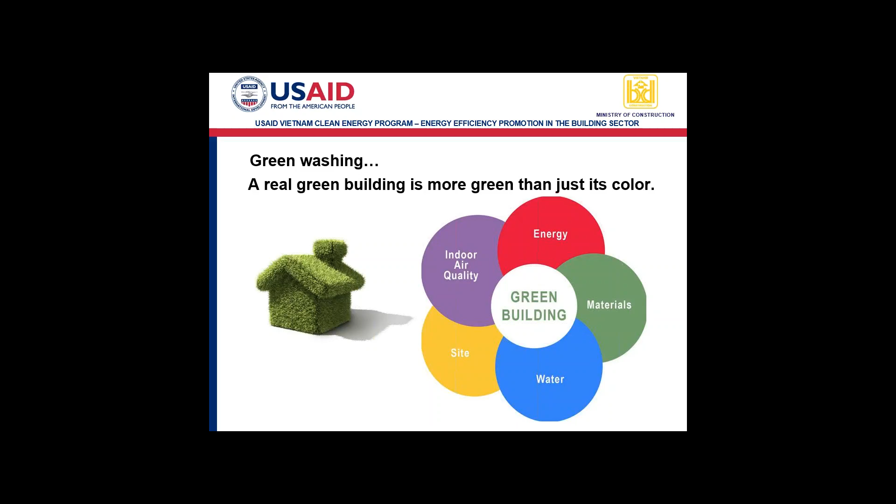Thế thì chúng ta lưu ý ở đây xây dựng công trình xanh không chỉ là xanh hình thức, mà nó phải đáp ứng được tất cả các yêu cầu ở các khía cạnh khác nhau của công trình. Many building owners want to market their building as being green, but they don't want to spend the money to do it. Nhiều chủ công trình mong muốn có được cái nhãn là công trình xanh để phục vụ cho việc marketing, nhưng trên thực tế thì họ lại không muốn đầu tư nhiều cho công trình của mình.

So what do green buildings do? They assure improved building quality. They assure social and environmental responsibility. They affirm higher quality of life for the building occupants and lower building operating costs. These are all things that green buildings do.

Và một công trình xanh cần phải đáp ứng được các yêu cầu về mặt chất lượng công trình, cũng như là có chi phí vận hành thấp hơn so với các công trình thông thường, cũng như là nâng cao chất lượng cuộc sống của người sống và làm việc ở trong công trình đó.

We're talking about possible incentives, tax incentives, cost incentives, refund part of the VAT tax, and electric tariff reduction. All of these are possible incentives, and there are also possible preferences. You may allow a building to have more floors or a greater occupancy density.

Khi một công trình được đánh giá là công trình xanh thì nó sẽ mang lại rất nhiều lợi ích, không chỉ trong quá trình xây dựng đối với chủ đầu tư, mà kể cả liên quan đến đóng thuế cho chính phủ, rồi là chi phí quá trình vận hành sau này, cũng như là việc có thể xin phép được nâng cao mật độ xây dựng hay là tăng số tầng của công trình, vân vân.

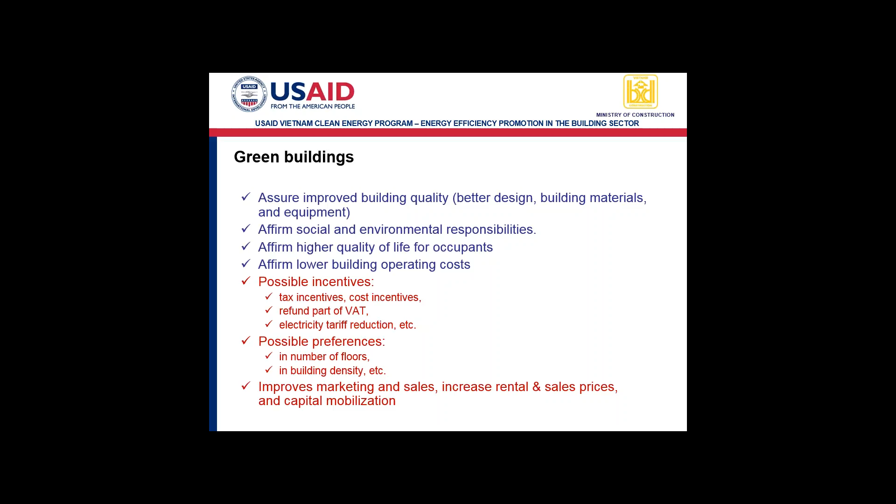Và buổi sáng mai thì sẽ có một bài thuyết trình về cơ chế khuyến khích cho công trình xanh, và chúng tôi trong khuôn khổ của dự án thì cũng hy vọng là sẽ thực hiện được một cái gọi là demo, trình diễn ở một công trình để có thể áp dụng các cơ chế khuyến khích này.

So here's an overview of the Lotus system. The Lotus system has 10 different factors that it examines for being green.

Energy: 34 points. Water: 15 points. Materials: 20 points. Ecology and siting: 13 points. Waste and pollution: 13 points. Health and comfort: 20 points. Adaptation and mitigation: 13 points. Community: 10 points. Management: 12 points. Innovation: 8 points. All of these different points let you have a rating as green.

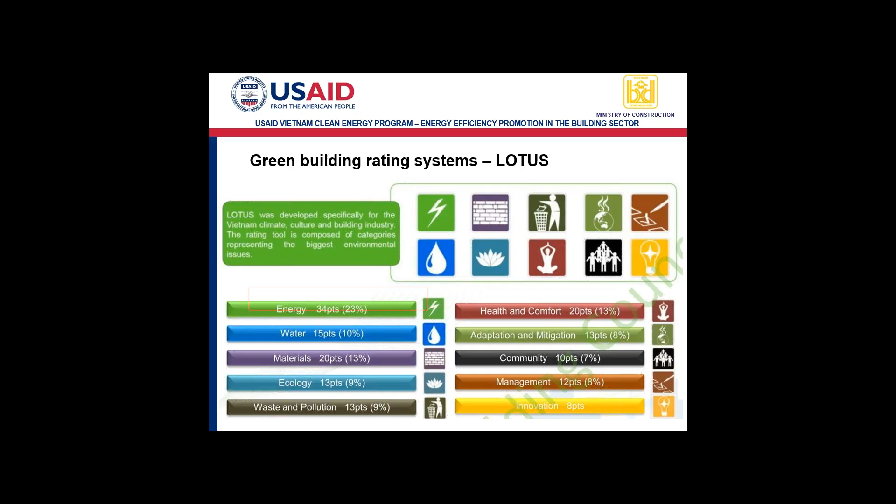Now here's the same type of approach for the LEED system. Here we have the same number, or roughly the same number of factors. We have sustainable sites with points, water efficiency, energy and atmosphere with the most points at 35, materials, and indoor environmental quality, innovation, regional priority, or community. Very similar to the Lotus system.

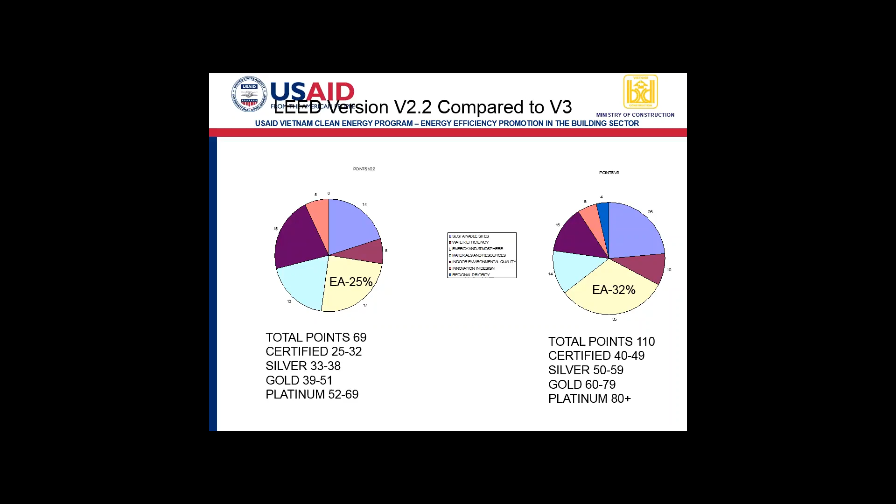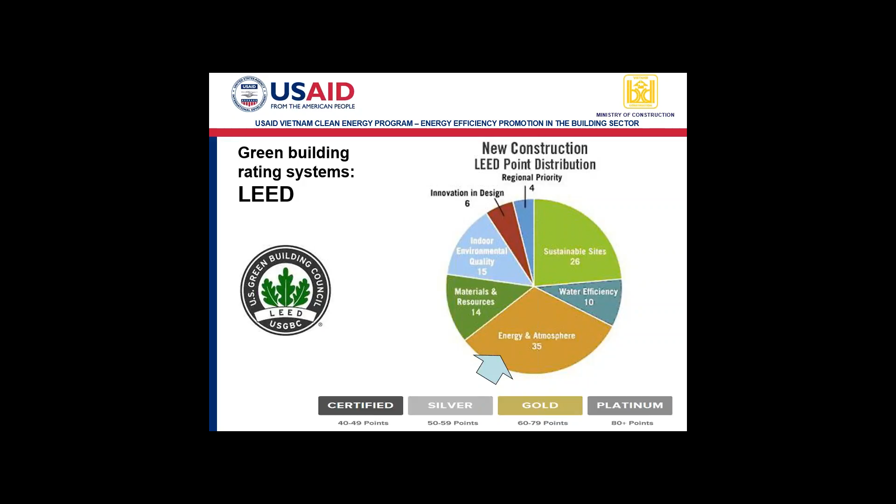For purposes here, this would be equivalent to saying that every public building larger than 2,500 square meters in Lao Cai province is required to meet at least a star 1 level of the MOC system or a basic level of Lotus or LEED. That it's required, not voluntary.

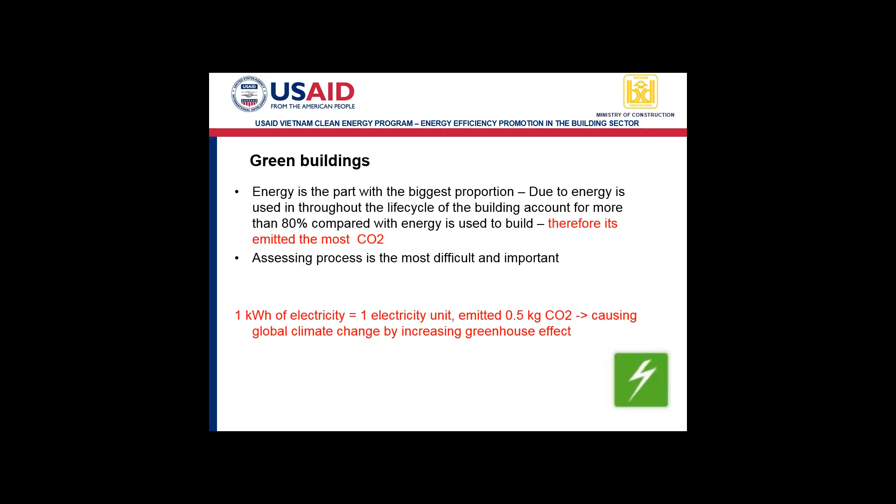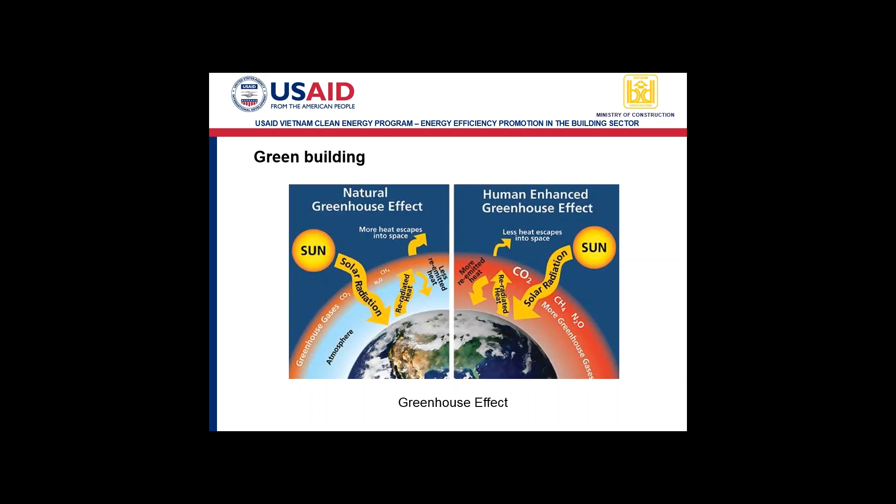And this is another chart that only is appearing in English, I guess. Where is the... how do I'm out of sync. Okay, now, it's only in English.

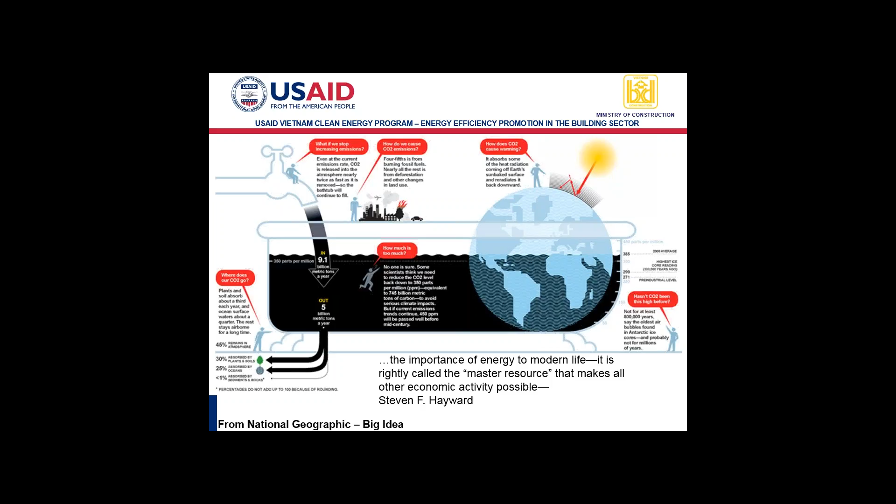Green buildings can also increase the energy security of Vietnam by reducing the need for fossil fuels and importing coal.

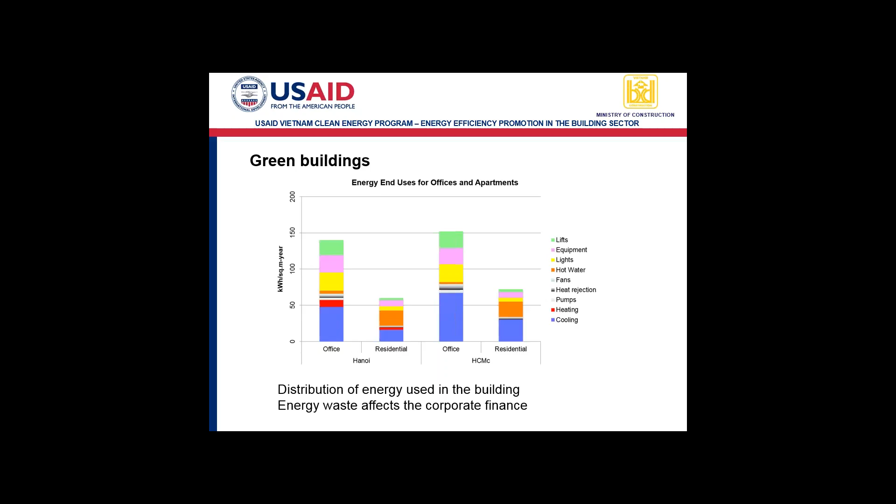So when a design team is designing a building, they need to know about how it's going to use its energy. Do vậy là khi mà chúng ta thiết kế các công trình ấy, thì phải biết được cái đặc tính sử dụng năng lượng của công trình để có những cái giải pháp phù hợp.

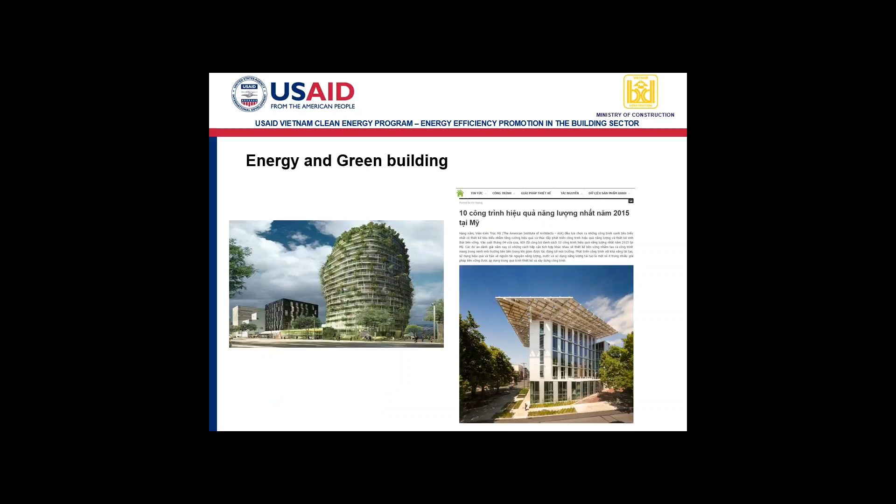These are some other green buildings, and one of the points that I'll make about green buildings is that they can be very good-looking buildings. Architects can make sexy buildings from green buildings.

Đây là một số hình ảnh về một số các công trình xanh, công trình hiệu năng cao khác.

Và đây là một số ví dụ của trong số 10 công trình hiệu quả nhất, đạt hiệu quả năng lượng cao nhất ở Mỹ năm 2015. Và chúng ta thấy thiết kế nó có những cái công trình nó có thiết kế rất là hấp dẫn về mặt kiến trúc. And one additional factor that isn't in these presentations is that green buildings can usually cost only 2 to 3% more than regular buildings.

Now, how do we assess energy for the green buildings? Cách thức đánh giá mức tiêu hao năng lượng của các công trình. I'm going to walk through the process for energy for the USGBC LEED system and talk about some of the important factors.

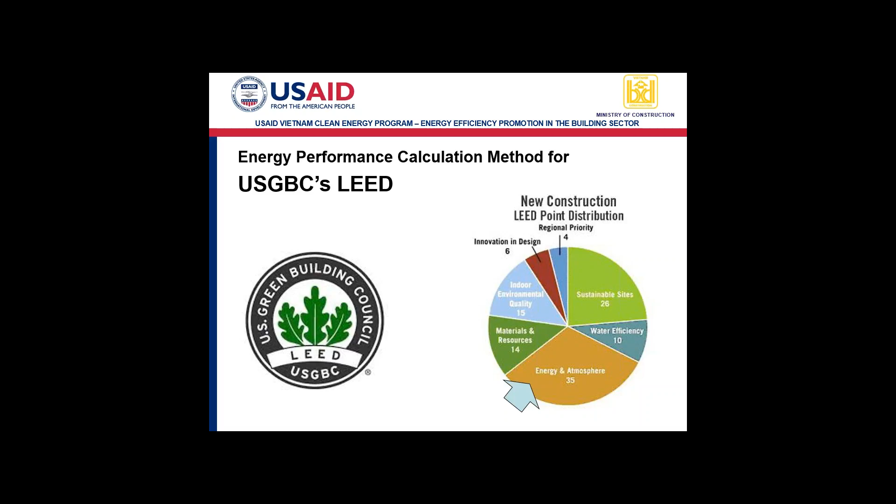10. So let's look at what you have to do to a building to get the LEED energy points. First, you have to do an annual energy analysis using computer simulation. Annual energy analysis. Đầu tiên là chúng ta phải tiến hành phân tích về mức sử dụng hay là mức tiêu hao năng lượng hàng năm của công trình.

And this is your proposed design, whatever the shape or the number of stories, the configuration, the amount of windows. This is your design. You then change and make a copy of the design, but you change it so that it exactly meets the requirements of the code. In the US, it would be the current energy code in the US, ASHRAE 90.1. Here in Vietnam, it would be the energy code from 2013.

Cái cách thức làm chúng ta lưu ý ở đây là ngay từ cái giai đoạn thiết kế công trình. Cái cách thức làm là chúng ta dựa trên cái thiết kế ban đầu đề xuất dự kiến của công trình và chúng ta copy tạo ra một cái mô hình tương tự và ở cái mô hình đề xuất này thì chúng ta sẽ có những cái thay đổi để mà phù hợp với các cái yêu cầu của cái tiêu chuẩn, chẳng hạn như là đối với Việt Nam là cái quy chuẩn 09.

Now your objective in the LEED system is to have your energy cost in dollars or VND. Your energy cost of your proposed design be less than the energy cost of the code building. Cái mục tiêu của chúng ta là tính toán cái lượng năng lượng tiêu thụ của công trình để làm sao cho là nó các cái phương án đề xuất ấy nó phải thấp hơn so với cả cái dự kiến ban đầu.

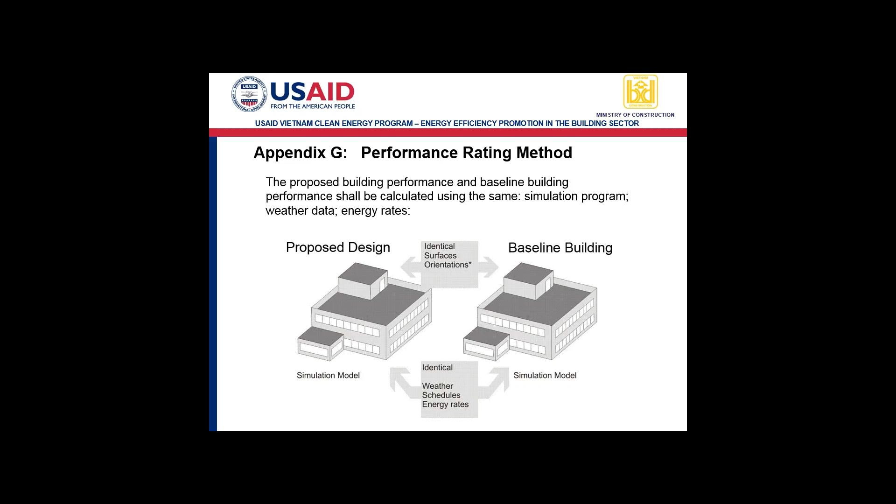This is a very important concept. So your baseline building uses all of the prescriptive measures that were discussed earlier today. This proposed design must be much more efficient.

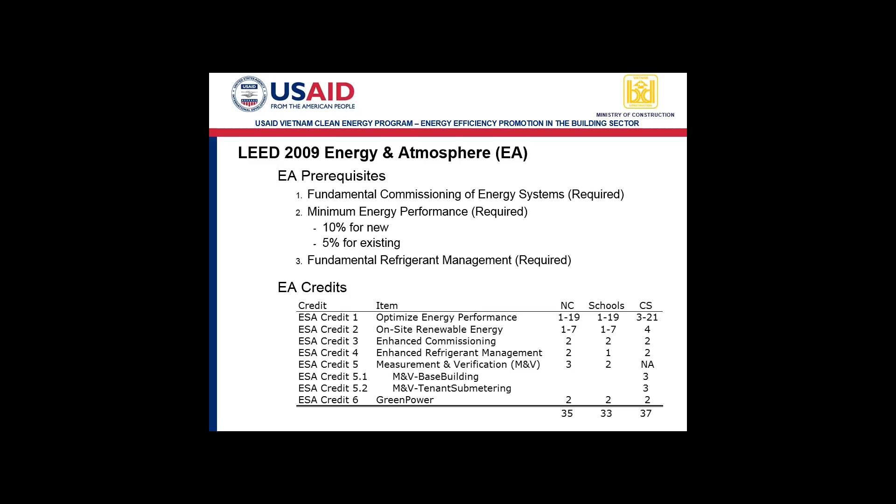Now, this chart, I think, is a key to the LEED system and the energy performance and getting points to it. So we just learned that to even qualify for LEED, you have to be 10% better than the energy code. You get no points for being just 10%.

Then if you're 30% better than the energy code for new construction, you get 10 points. So if you want to have a LEED certification with a minimum 40 points, you can get 1/4 of those points, or 25%, by being 30% better. If you are 48% better, you can get 19 points.

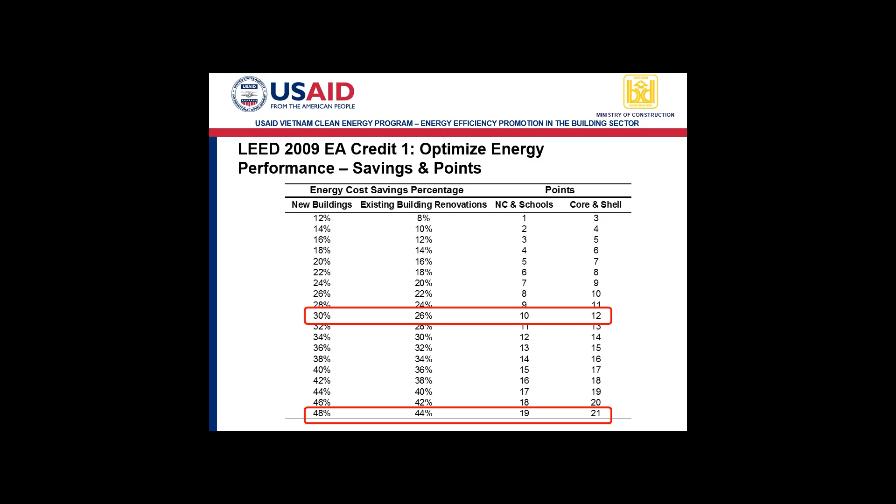There are also programs in the United States that give money to the design team and to the building owner to help afford the extra cost of doing more energy efficiency.

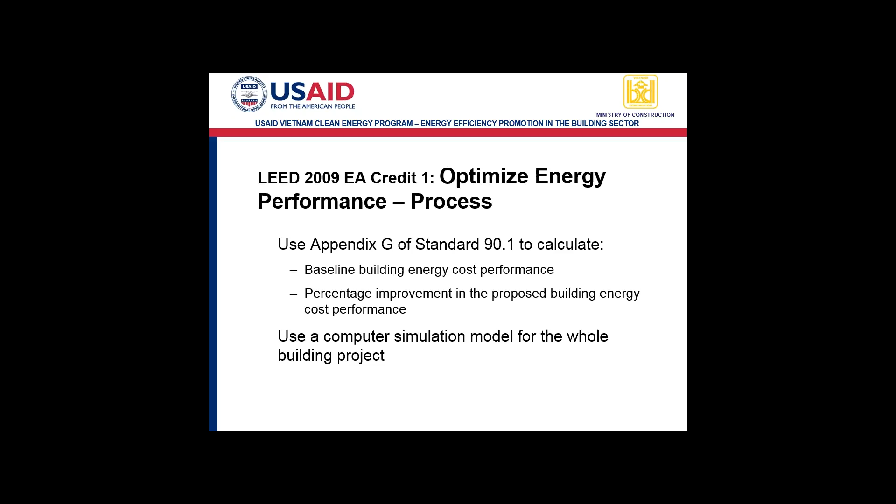So this gives the detailed and the minimum requirements for the computer program capabilities for doing the analysis.

You cannot use steady state analysis to solve this problem. You must use an hour by hour program.

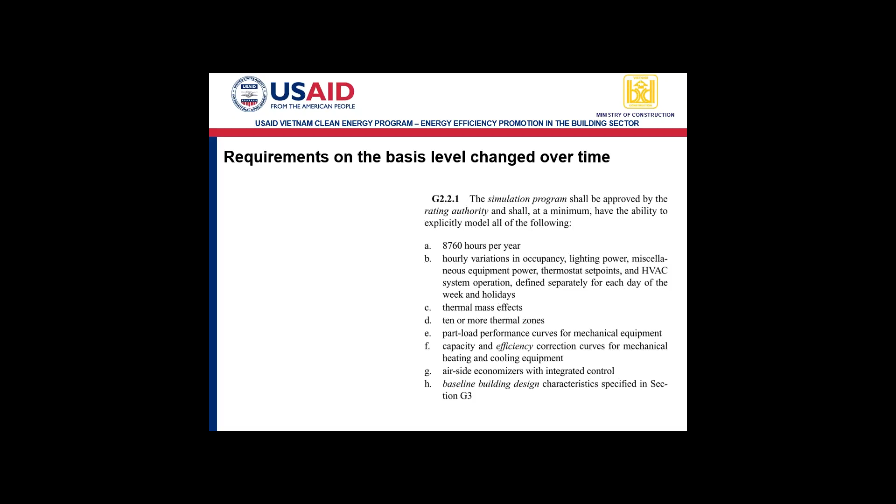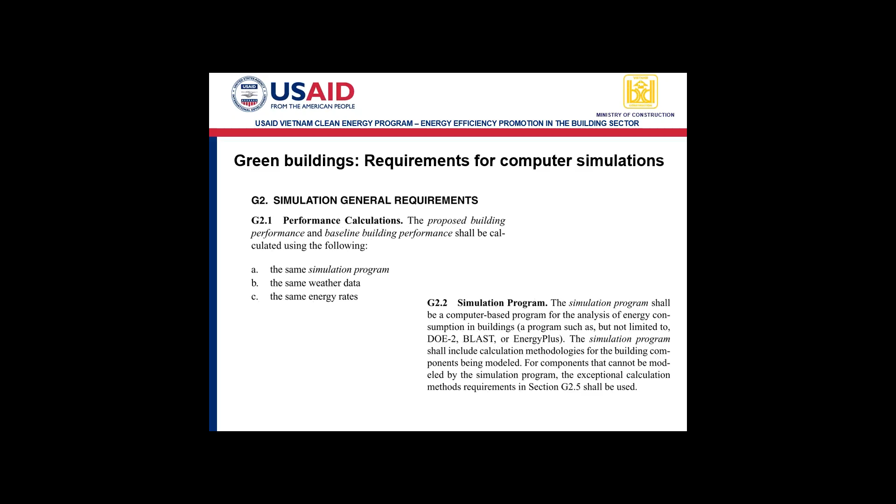So here is the energy standard in the United States. It's ASHRAE, the Illuminating Engineering Society, ANSI, and it's supported by the Department of Energy, by the federal government.

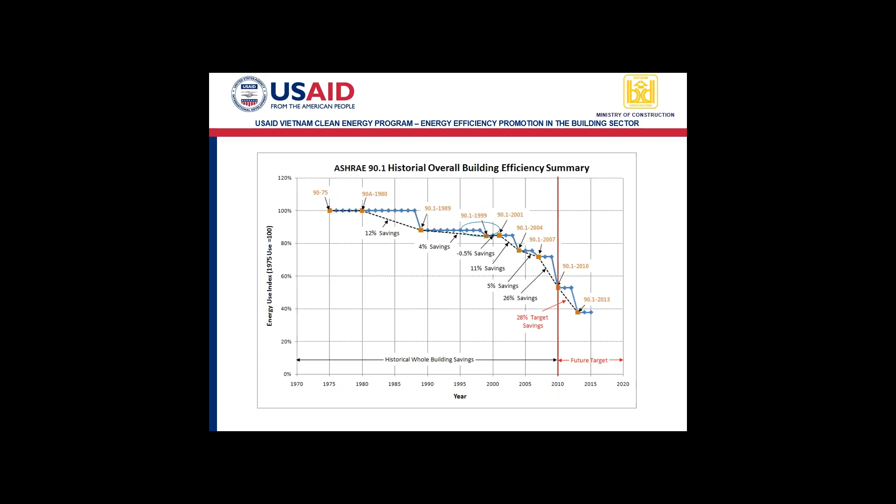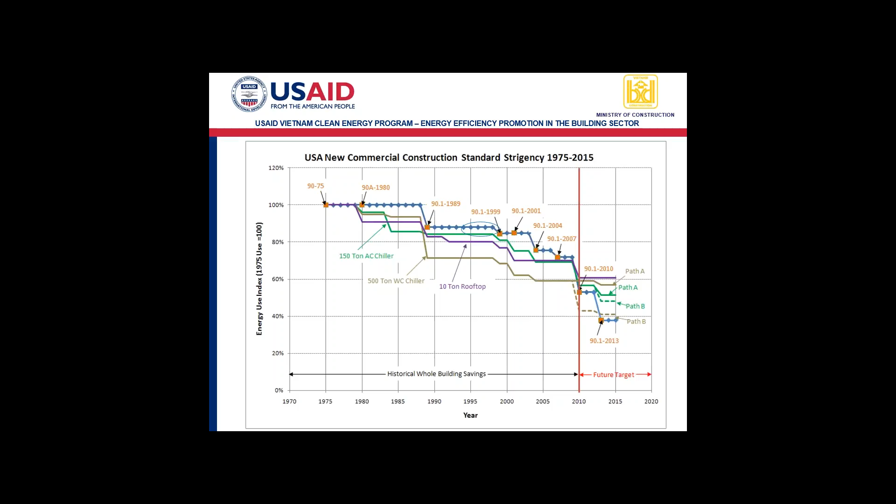So even so, in California, there's a goal that says by the year 2020, all new residential buildings, all houses and apartment buildings have to be net zero.

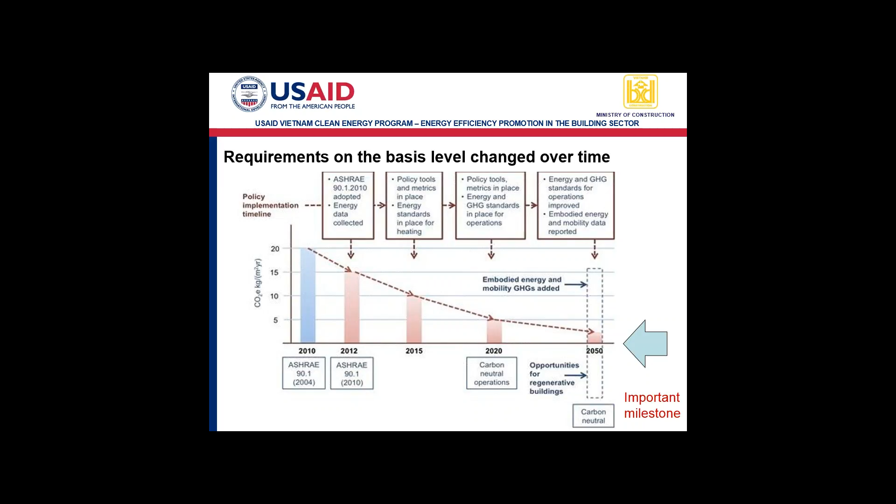So this is a summary then of how to begin to compute the energy for a green building and for a high performance building.

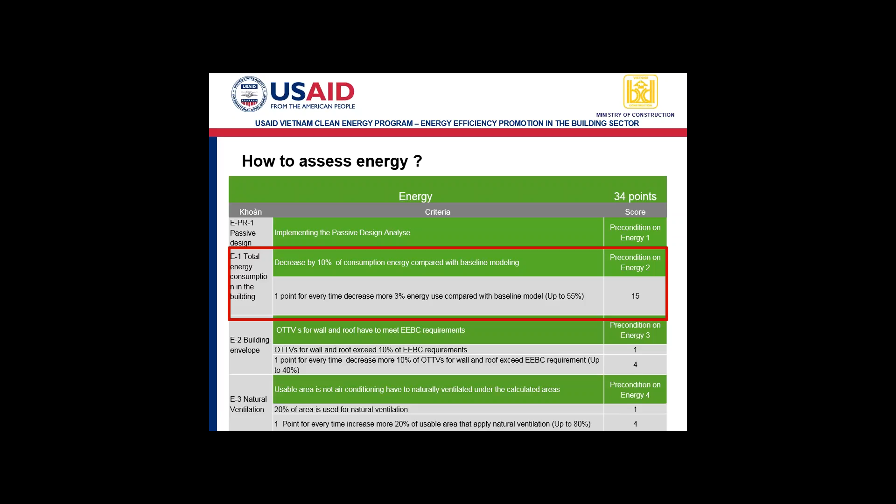Now the following slides describe the same process for Lotus, not for LEED, but for Lotus. But they're hard to read, and I think I'm getting close to being out of time, so I'm going to quickly go through these. It's the same process as for LEED.

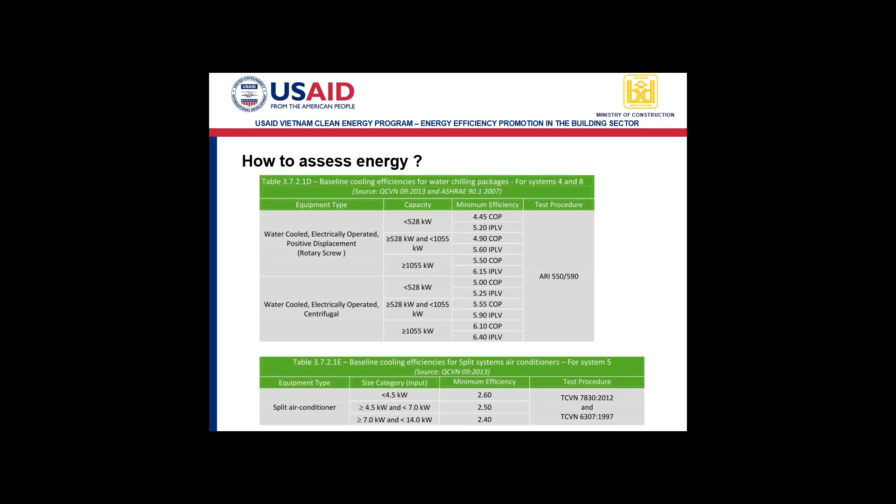So in general, this is the process for how you get a high performance building, how you go beyond the code to do 10, 20, 30% better, and then how you add in the other features to get a green building.